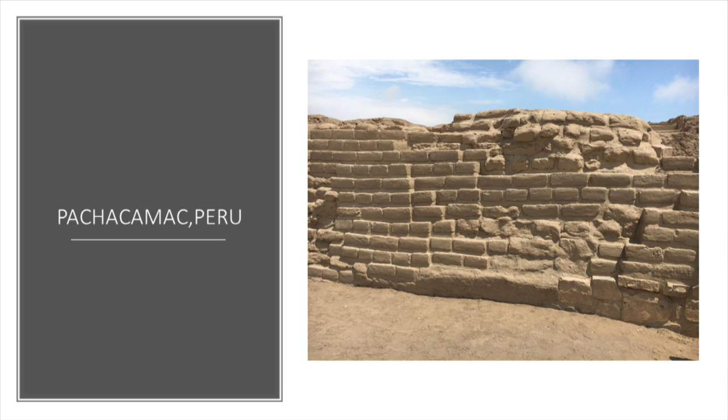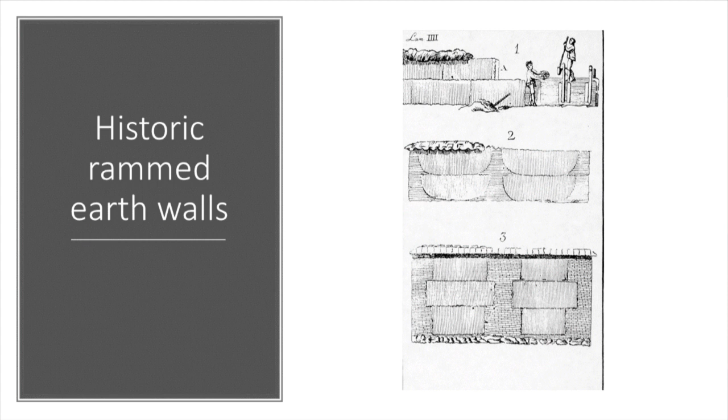The rammed earth technique has been around for a long time. We're sort of discovering it now, but it's been around for a long time. This is a 17th century document that talks about other construction methods, but this particular section is on rammed earth. There are a lot of ancient rammed earth buildings, and here you see different types of rammed earth.

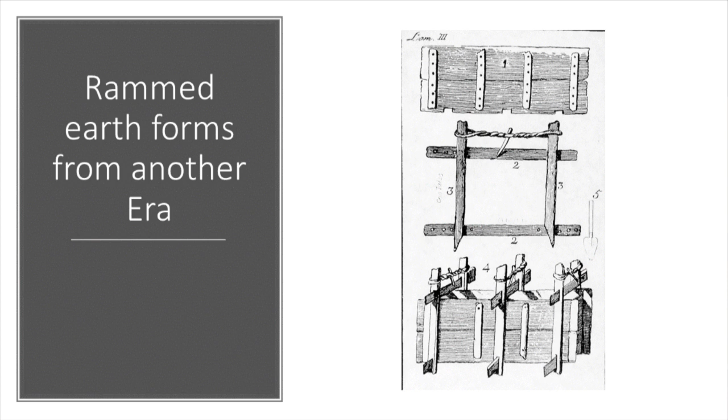So it's been around for a long time. This is our primitive formwork. This is the way rammed earth used to be built, with that kind of formwork. And when it need be, we can always go back to that. It's very simple, very primitive, and very effective.

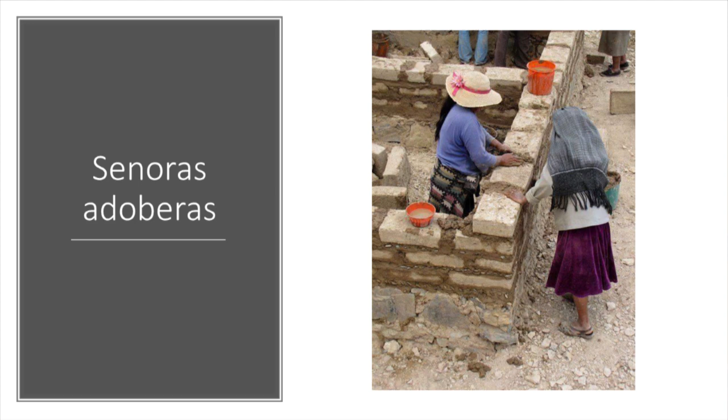Right now this type of construction is only for the wealthy because it's very expensive, the labor is very expensive. But if you have communities that want to participate, you can build your structures, and it goes pretty fast. The only requirement to whoever the house is being built for is to wine and dine the crew.

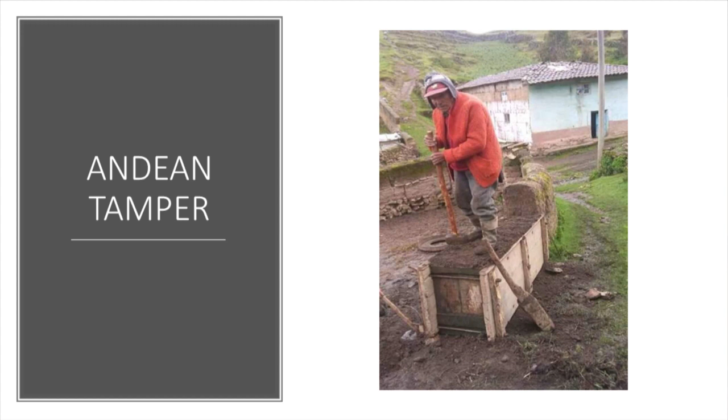Here we have a tapialero, a tamper, in a very primitive way of making rammed earth. This is the way it's done historically, down in South America in the Andes. Look how simple—remember those drawings of the formwork? It's the same thing, it hasn't changed. Luckily for us, you can go around the world and see all these examples. They're still alive.

There's a saying, and it probably translates to all the languages in the world: 'Para una buena casa, hay que tener buenos zapatos y un buen sombrero.' For a good house, you need to have good shoes and a good hat.

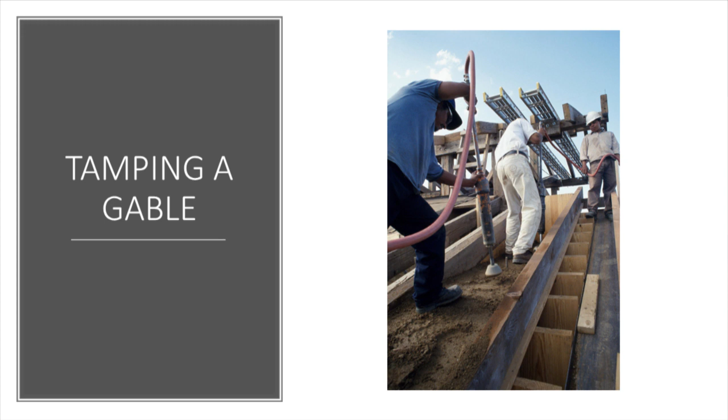Okay, here we are building a gable. It's not just straight walls, you can build gables and get pretty creative with it.

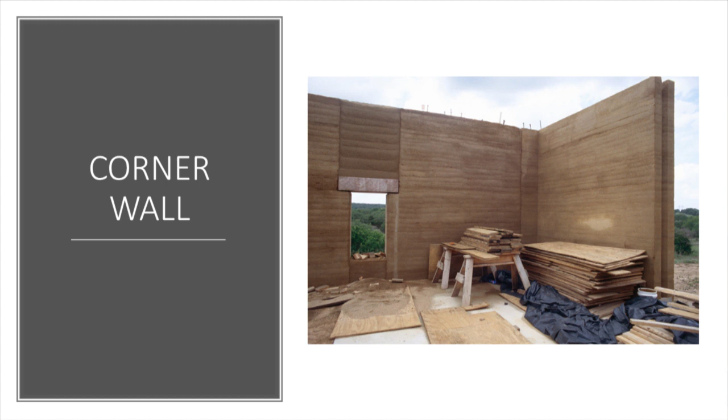Okay, here, the neat thing about rammed earth is when you finish the wall, that's your finished wall. You don't have to do anything.

And it's also very transparent. Not that you can see through it, but you can see how it was built. The steps. You start with the corners, then you build the wall, then the other wall, and then you put the lintel, and then you build the top. So on and so forth. It's like building with blocks, although you create the blocks in the forms.

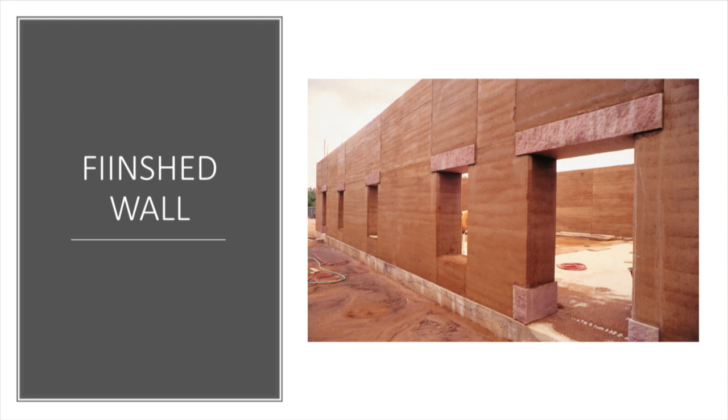Oh my God. You know, those lintels, they're not lightweight. You need a crane to install them. But that's all material within just a few miles from the site.

Okay, this is the studio of a friend of mine. He's an artist in Austin. A few of you all went to school at UT, School of Architecture. He was the head of the computer lab. Renaissance man. He played the clarinet. Just an incredible guy. And we built this.

This is the garage, the carport on West 17th Street. That's right downtown, 2 blocks from the campus. And we had to go to the Board of Adjustment to let us. You could only build in the footprint of the existing building.

So we went over it a little bit, and we presented it to the Board of Adjustment, and they saw the plans, and they unanimously approved it, if and when you build it the way you say you can.

So the challenge is to get city council, building inspection department to understand these things. The nice thing about rammed earth is that the building inspectors don't know anything about it.

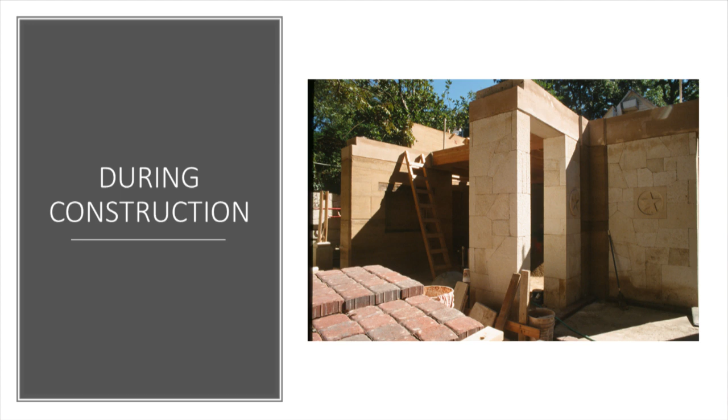And they have what they call a bone pile. It's all this discarded stone. You buy it by the ton, $25 a ton. And some good stone workers, they just do magic with that stuff.

Okay, here we have a modern pneumatic tamper that we use. It does go faster, but one thing that I've noticed, you notice on that drawing, that 17th century drawing of tamping, their tampers were pointed. And maybe there's a lesson there that you can really get into the nooks and crannies in the formwork.

So maybe we can come up with a set of modern tampers just for rammed earth niches. And the advantage of thick wall buildings like this is that you have all this thickness to play with. And you create a niche, and then the resident puts whatever they want. By the way, that's not a dinosaur bone.

It's just, okay, another, here we have a sample of the materials that we used in this building. Rammed earth, the material is decomposed granite. Then we have a rubble fill, and we gave this finish made with cactus juice, nopal, baba de nopal, which is a pre-Columbian technique that has been revived, and it's just totally high-end finish. And it has a gleam to it.

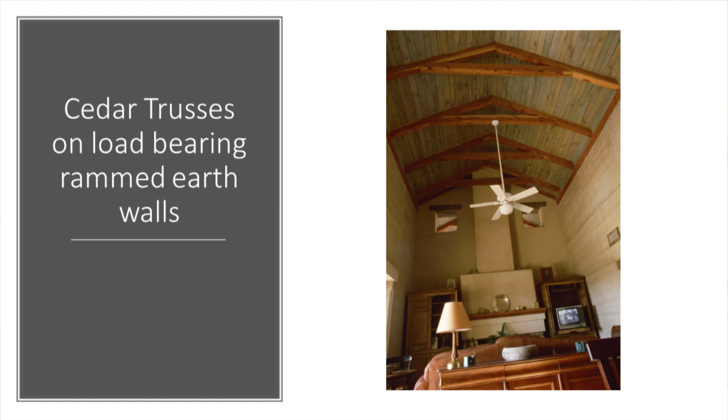This cedar comes from the Bastrop area. Wampers, if you ever go there, they're good suppliers of cedar, and they'll do anything we need.

So these trusses are being supported by rammed earth walls. The wall to the right is a shear wall, and normally you don't do rammed earth walls in the interior because it takes up so much space and time. But just to keep a structural balance, we opted to build both of these walls out of rammed earth material.

But our other material was compressed block. So you have rammed earth and compressed block, all from the site.

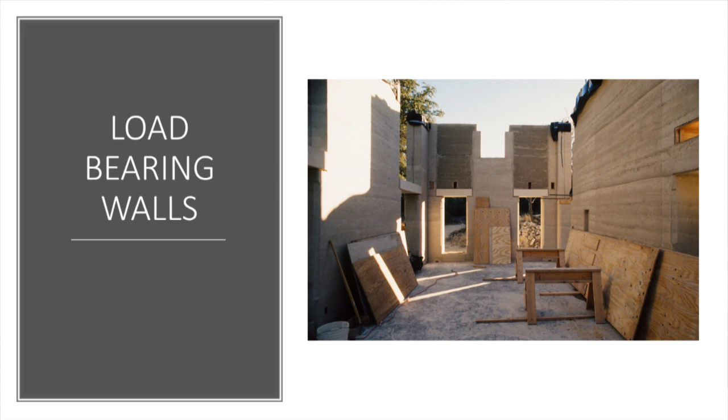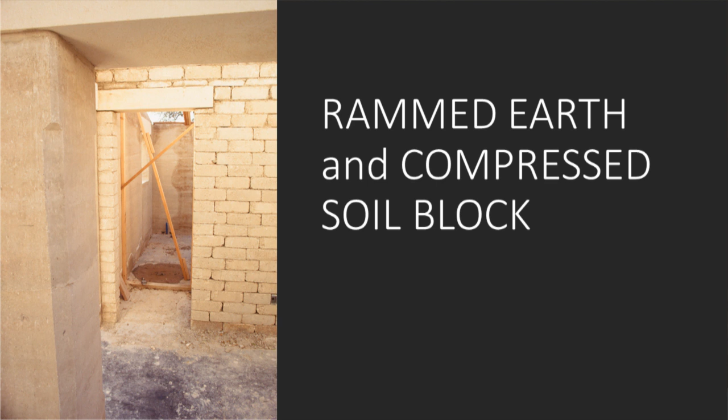Okay, this is a house in Alpine, Texas. It's an adobe house. You can probably see it when you're coming in from Fort Stockton, on the other side of the Sul Ross campus.

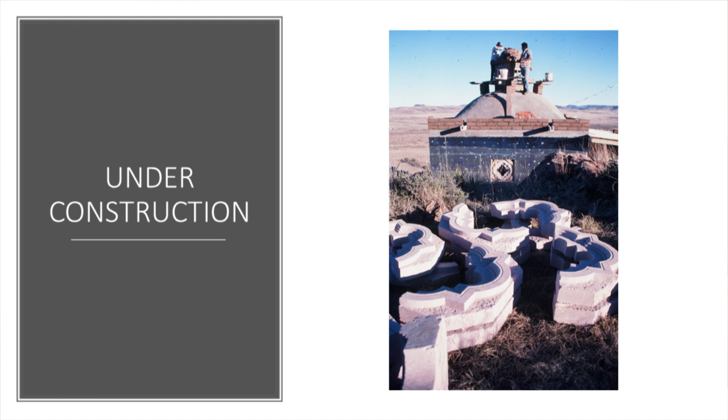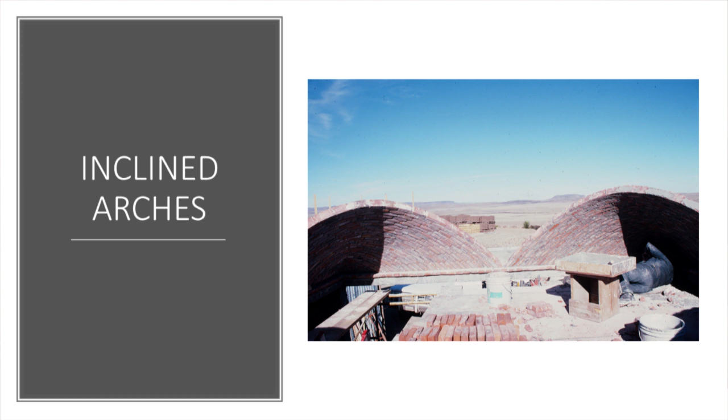And then we used stone for the windows all the way — ox-eyes, quadrifoil windows, adobe walls — and then what I call Nubian vaults, bovedas. If you've ever seen one built, it's just magic to see how you can build your shelter without using formwork.

That's what it looks like at the end. Yeah, they have that at the Mission Library now. Did you know that? Next to Mission San Jose, they built those vaults. Oh yeah? Oh yeah, Mission Library.

Logan, how is that waterproof, that previous slide on the outside? Well, first you put a stucco mortar over it, then a waterproofing agent, and then you put the tile. Oh okay, so that was another layer of tile. Gotcha.

Okay, another thing is the built-in furniture that you can do with thick walls. These are cabinets that we built through the wall. This is the technique, by the way, that was imported to the New World when Spain had this trade with Asia.

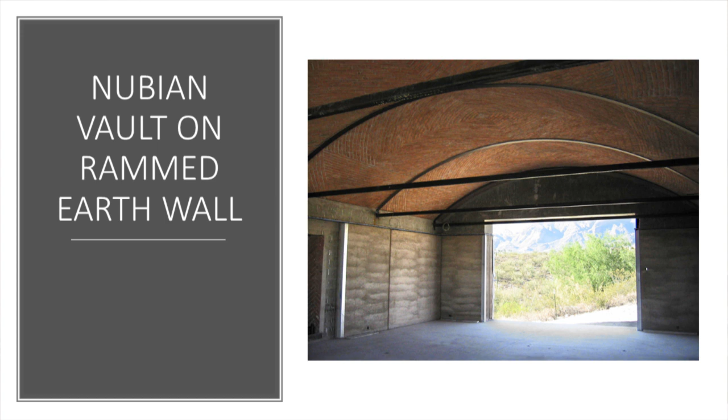Okay, this is a house in Austin, the Hood House. It's a two-story rammed earth structure.

And they really got into it. This house got the maximum Austin Energy Award ever. They have a wetland system, rammed earth everywhere, solar panels, just you name it.

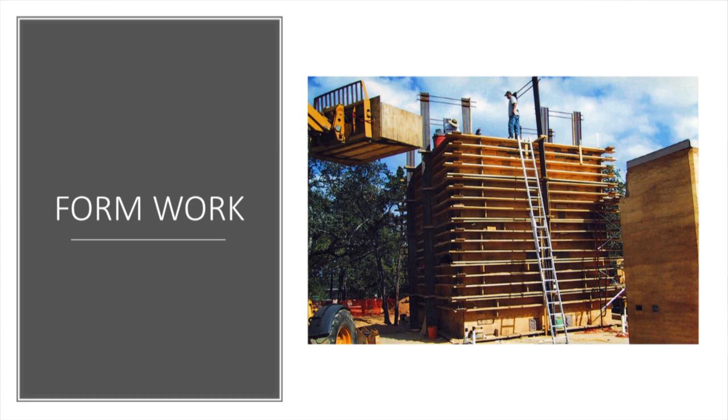Working with students at Texas A&M, I had a course where it was getting the students to build things. But the requirement was that it either had to be a natural material or a recyclable material. And they came up with some beautiful examples.

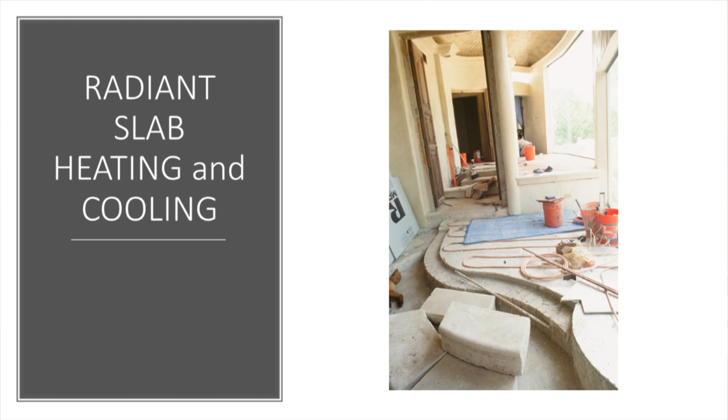Another thing that we did in this project was radiant slab heating and cooling. It wasn't liquid, it was connected to the AC system. So you have heating and cooling in the floor, which is the best way to heat a building. You don't hear anything, you can go around barefoot in the harshest winter.

It's great. This is what the floor looks like. All that limestone, we harvested and carved it, hand carved it with primitive tools, 20 feet from where it was being used.

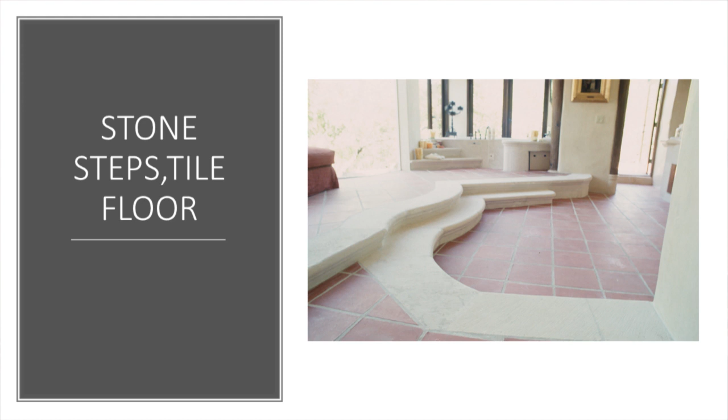And we have plenty of it here, and the government pays you to destroy it, get rid of it, or use it for barbecue. But it's an excellent building material, and those doors are antique doors, made out of mesquite, and they're very weather resistant. Why can't we make that?

These were the downspouts that were carved right there at the site. I love it - that's in place.

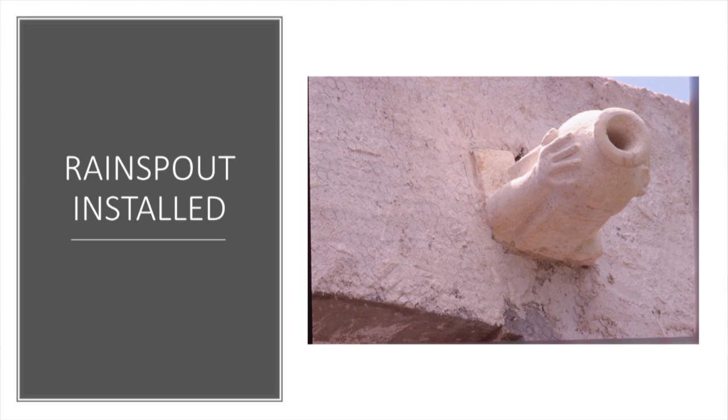Now, let me see if I can get this to go. Well, that's it. Thank you. Bravo.

So, if there's any questions? One, Logan, you were mentioning that cactus juice finish. It reminds me of the Tadelakt finish that was famous in Morocco. Is there a similarity between those kinds of finishes? What did you call it? Tadelakt? T-A-D-E-L-A-K-T is the English spelling for it. Is it from cactus, do you know?

I don't think so. No, it's lime. Because this, we have to go and harvest cactus to get it. And you cut it up into little pieces, put it in a bucket, add a little water, come back the next day, and you have this burnishing liquid. We used it in one of your demonstrations about six years ago.

The cactus was put into the plaster because the plaster didn't crack that way. I think Jim had a partner and they held it at ECT. Yeah, we used cactus juice in ECT workshops there. They didn't burnish it, but they used it to hold the plaster together against cracking. It's a binding element, an excellent binding element, and you can mix it with your paint.